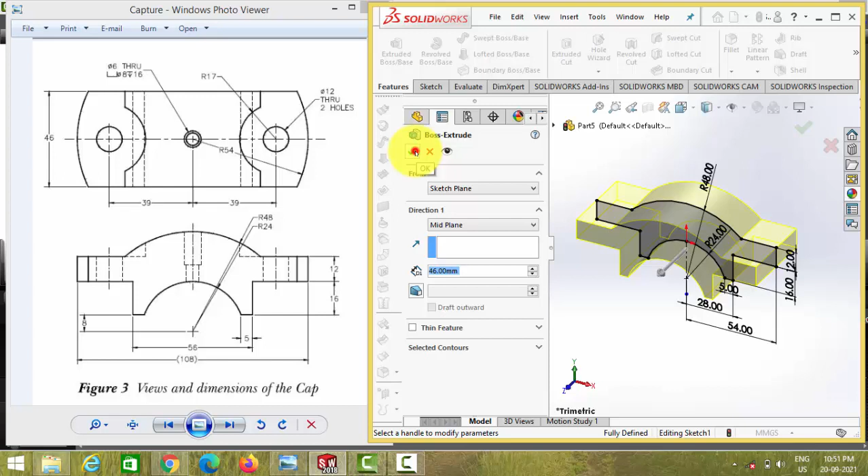And there are 2 holes on both the sides having 12 mm dia. Selecting this plane and sketch. Give Ctrl 8 to make the plane normal. The diameter is 12 mm. This point and this point are horizontal. The center distance is 39 mm.

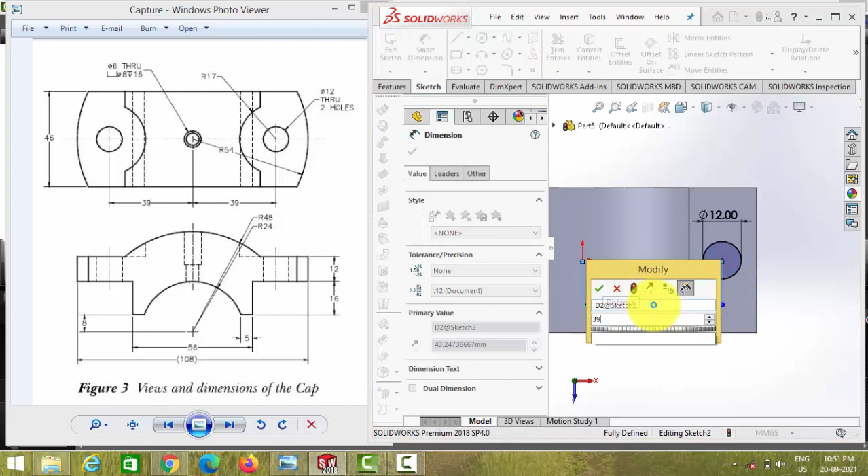And this is a through cut, so I am giving extruded cut through all.

Then we have to create a curve like this. Draw an arc. The center point of that arc is exactly at the center, so I am selecting this point and this center and coincident. It's having a radius of 54 mm. Now it is fully constrained.

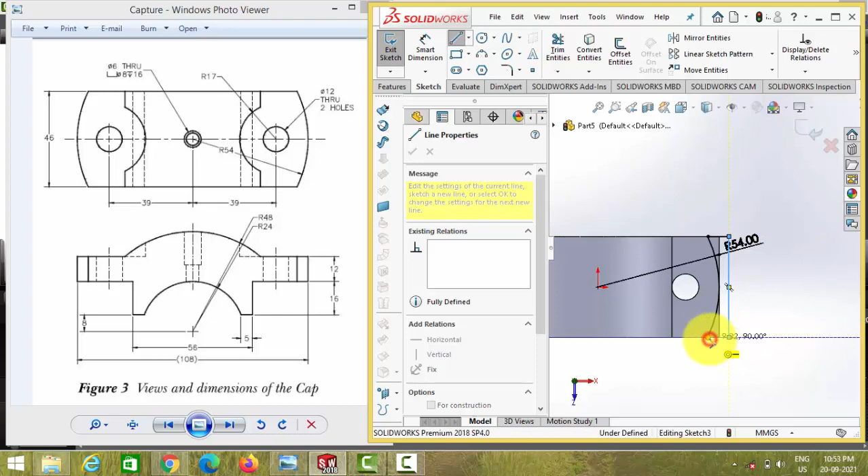Let us close the sketch. So this has to be removed, so I am giving extruded cut for through all. Let me check the direction, it's right.

Okay. Then we have to create a small curve like this. So for that I am using this plane for drawing that sketch. Here we are having an arc with the radius 17. It is having its center here. So this circle and this point are concentric. Its radius is 17 mm.

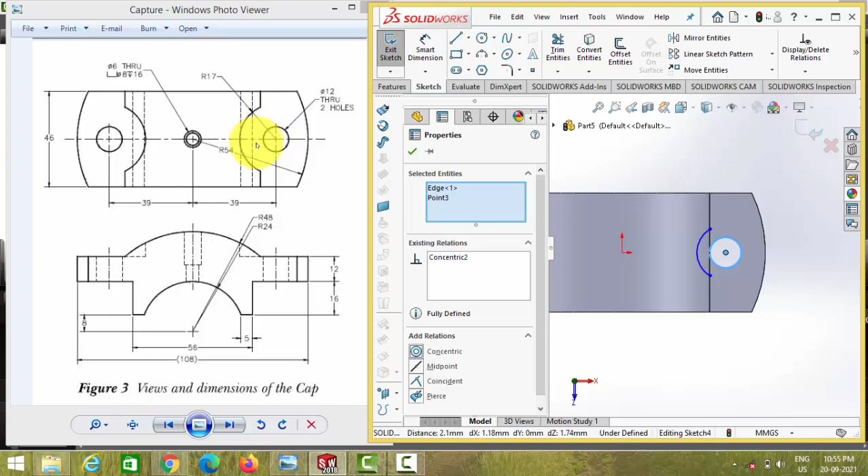Close this. Okay, now go to feature and give extruded cut. Flip the direction and give through all. Okay, we have performed that.

So all those things has to be done in the left hand side also. So I am selecting this cut extrude, this cut extrude and this cut extrude and giving mirror, and selecting mirror plane as this right plane. So now everything has been transferred to the other side.

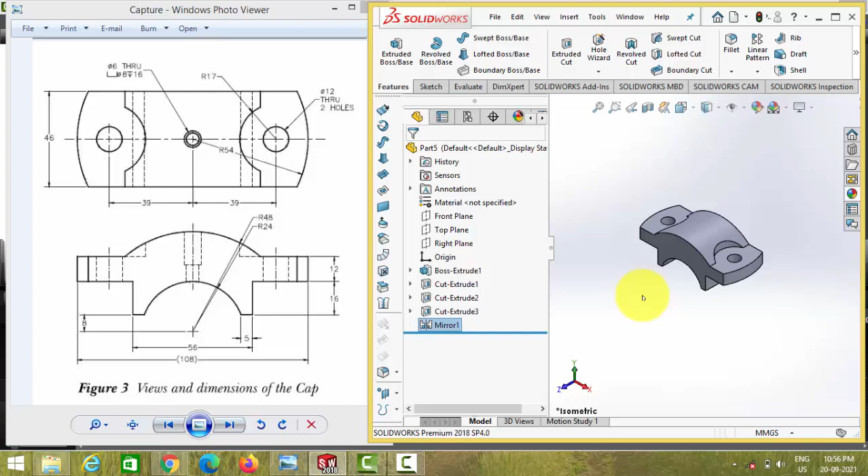Okay, so then we have to create a hole here. For that I am preferring the center plane. Where is that? Here. So here I am drawing the diagram, Control 8. So here we need a hole like this.

Okay, I am giving dimensions here. This is having a dimension of, here it is given 16 mm and 8 mm and 6 mm. So this is 6 mm, so its radius is 3 mm. This is 8 mm, so its radius is 4 mm. And this is having a height of up to 16 mm. So this is 16 mm here.

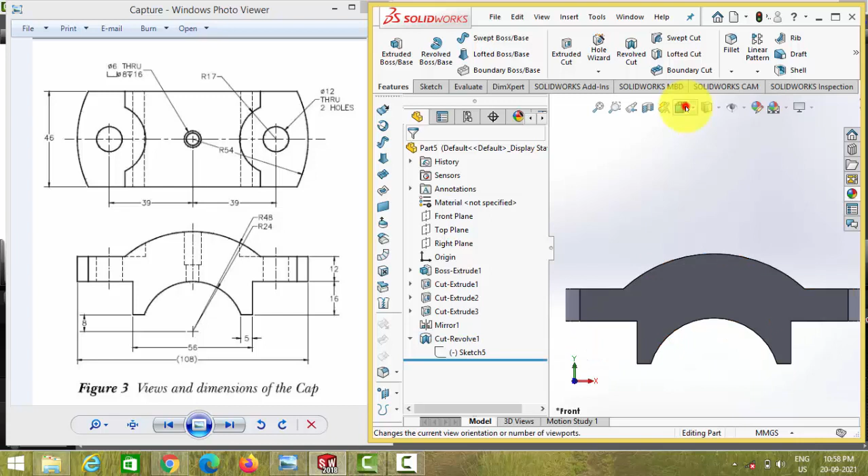Okay. So now it's almost done. So now we have to remove the material by using the revolve cut option. The axis of rotation is this. Let us see that in the top view that a cut has been created.

Okay, now everything is done in this cap part. So let us save this part as cap and then move to the next part.

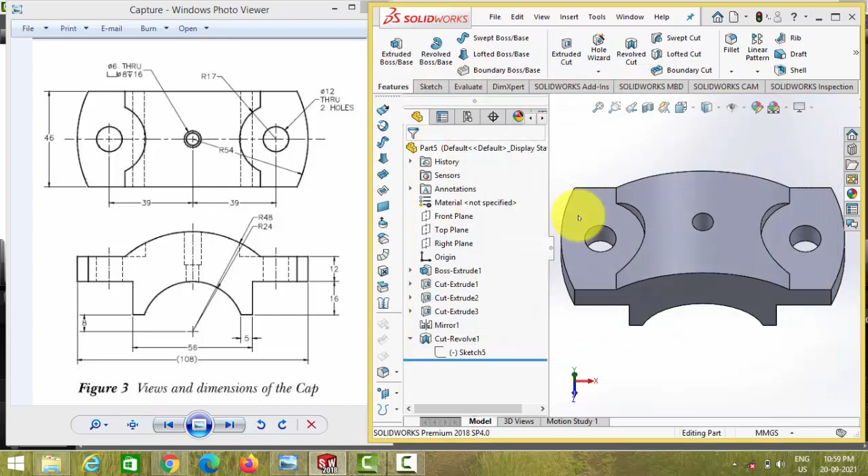That is this bearing. Now I am closing this and opening a new part, that is bearing. We have to create this cross section and we can revolve that. So I am taking the front plane and sketching.

First of all, I am drawing a center line over here. Then I am drawing half of that and I will try to mirror that. Okay, first let me give a constraint. This point and this point are vertical. Okay, then we'll give the dimensions.

This is 32 mm, so this will be 32 by 2. Then this is 44 mm, so this will be 44 by 2. And then this is 48 mm, by 2. This distance is 9 mm. Total diameter is 64, so I am giving this here. This is 64 by 2.

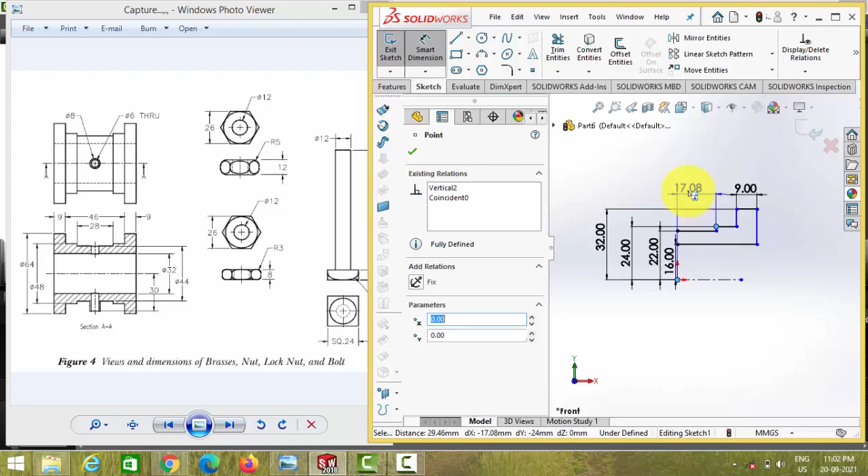This is 28 mm, so this distance will be 28 by 2. This is 46 mm, so this distance will be 46 by 2.

Now one dimension is missing, it is missing. This has to be vertical, so we can give this as vertical. So now everything is constrained. So what we can do is mirroring everything by, let us create a center line here.

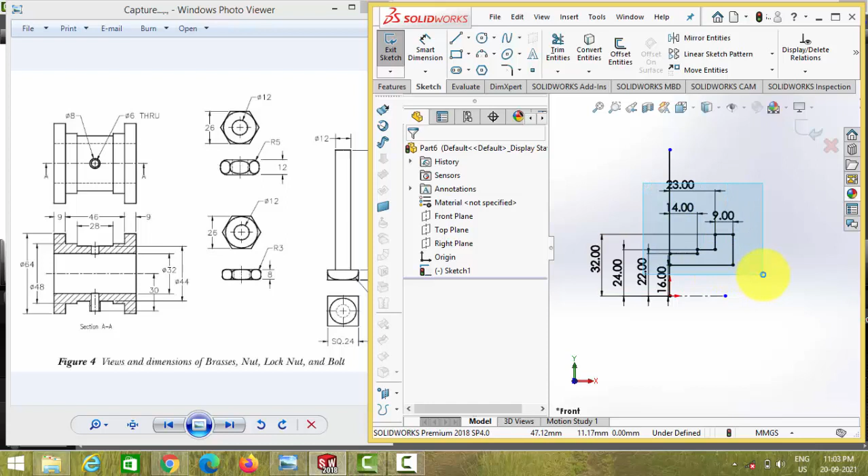A vertical center line. Now let us select all these edges and give mirror entities, and mirror about this center line. So it has been mirrored. And now create

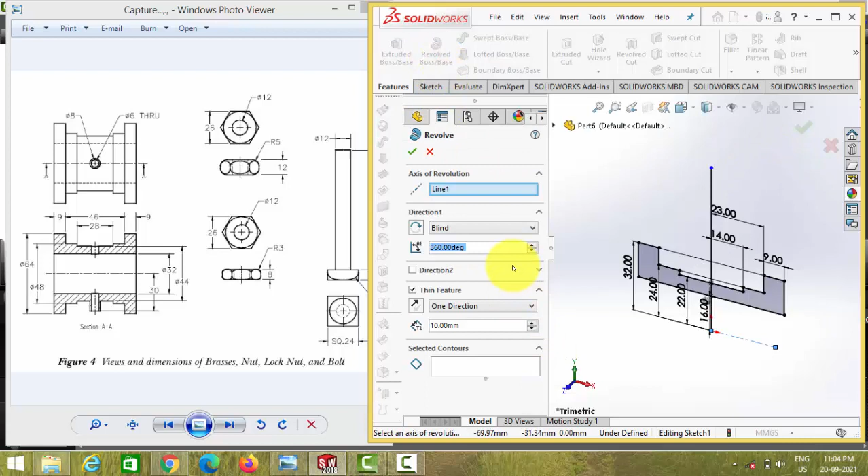that is not extruded boss, that is revolved boss. Axis of revolution is this line. Revolve. So the axis is already selected as we given.

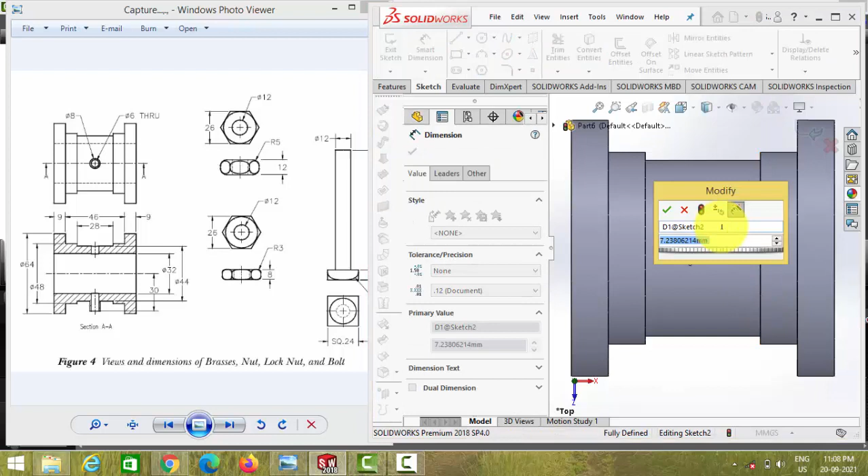It's done. Then we have to create a hole over here, a through hole having a diameter of 6 mm. So I am selecting the top plane, selecting sketch, drawing Control 8, and drawing a circle of diameter 6 mm. That is a through hole, so I am giving extruded cut

through on both the sides. So it has been created. And then we have to create one more thing, that is a small projection here.

If you want to draw this projection, we cannot create a sketch over this curved surface. So instead, what we can do is create the sketch in the top plane itself, and offset that to some distance 30 mm below that. Let me do that. I will select the top plane, give sketch, and draw the sketch over there.

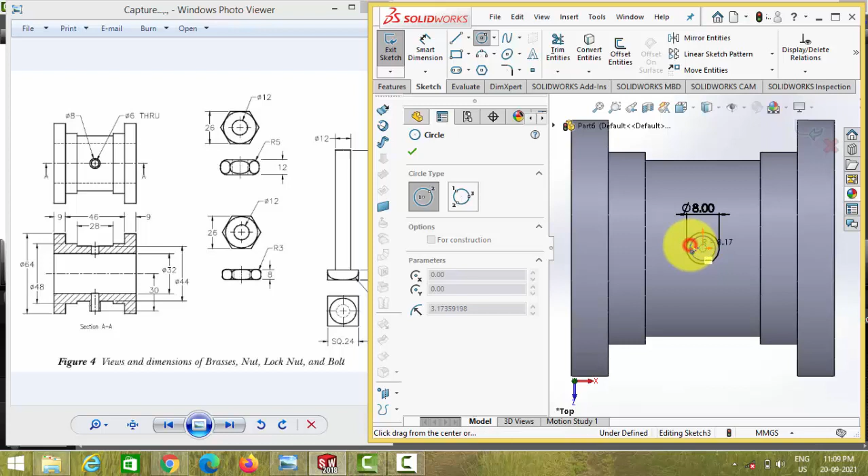You have to draw an 8 mm circle, and also a 6 mm circle.

Then we have to go to create extruded boss, and now we have to be very careful. Go to the 3D view, isometric view, and we should not extrude from the sketch plane. We have to create an offset plane. That offset should be on the bottom side, so I am changing that direction.

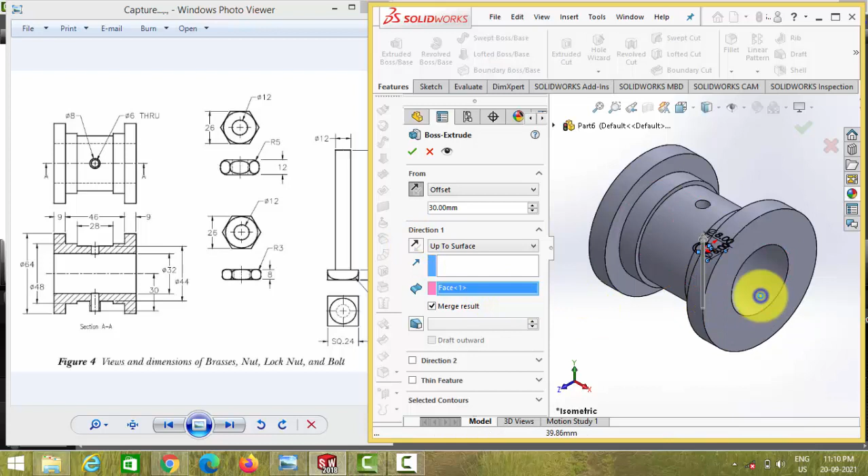The distance is 30 mm, so we have to extrude from here. Offsetting distance is 30 mm, and extrusion distance can go up to this particular surface. We can give up to surface, change the direction, and this surface is the limit. I think it has been created successfully.

Let me check that. Yes, we have created that successfully. We have drawn these two circles in the middle plane, offset that plane to this 30 mm distance, and extruded that up to this surface. It's done. So now we have completed this bearing.

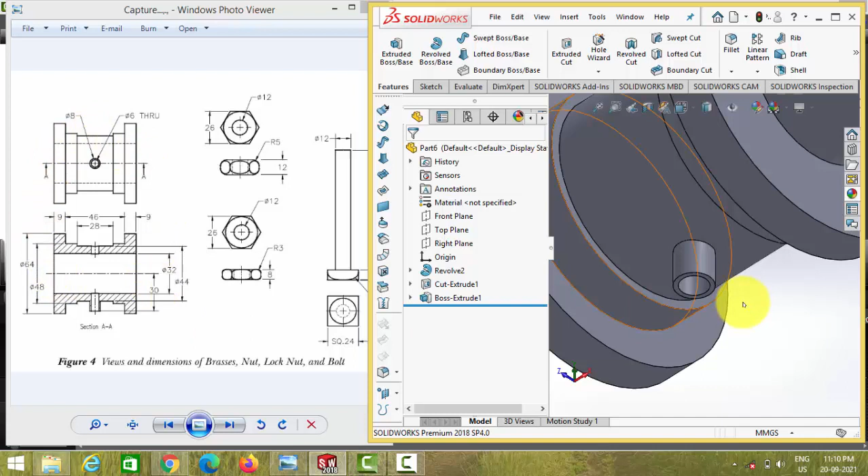Let us save that, and then we have to draw this bolt and nuts and lock nut. I am closing this. To draw this bolt, I am creating a small extrude.

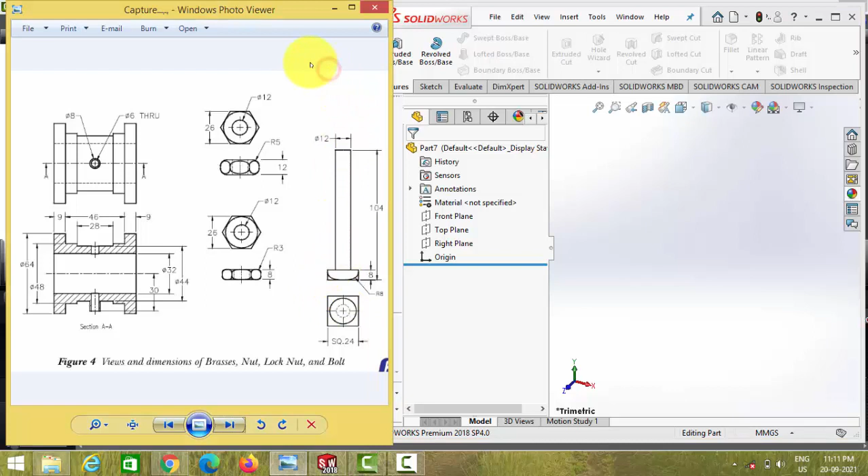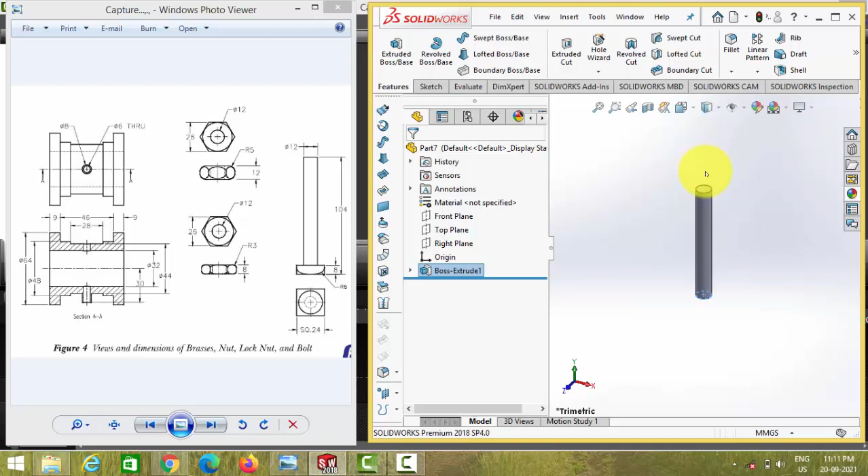Go into top plane and sketch a simple circle of diameter 12 mm, and the extrude should be a dimension of 104 minus 8. So that is 104 minus 8, 96 mm. Then at the head of this we have to draw the bolt head.

That is actually a square, so we have to create a square. We can draw a center rectangle, click the center and draw this, and we can give only one dimension, that is square 24. So we give one dimension as 24 mm, and give a constraint: this line and this line are equal in length, so it will create automatically.

So it has to be extruded for a length of 8 mm. Going to features, extruded base for a length of 8 mm. Let us check the direction. Yeah, it's correct. So we have created that.

Then we are seeing a small blunt surface is over there, so as to create a circle when viewed from the top. I am doing that by drawing a sketch in this right plane, giving sketch, Control 8. I am drawing a small arc.

That is having a radius of 8 mm as given in this sketch. This is having a radius of 8 mm. Now I am closing this sketch. Before that we have to draw an axis for revolution. I am drawing a center line.

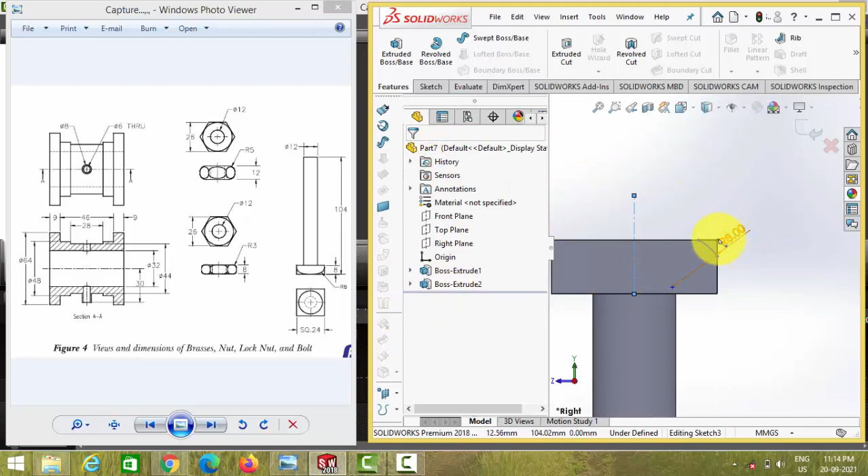Now I am going to features, revolve cut. So now the axis has been automatically detected. Zero thickness geometry - so let us do one thing, go to the geometry and extend these lines so that it will create without any problem.

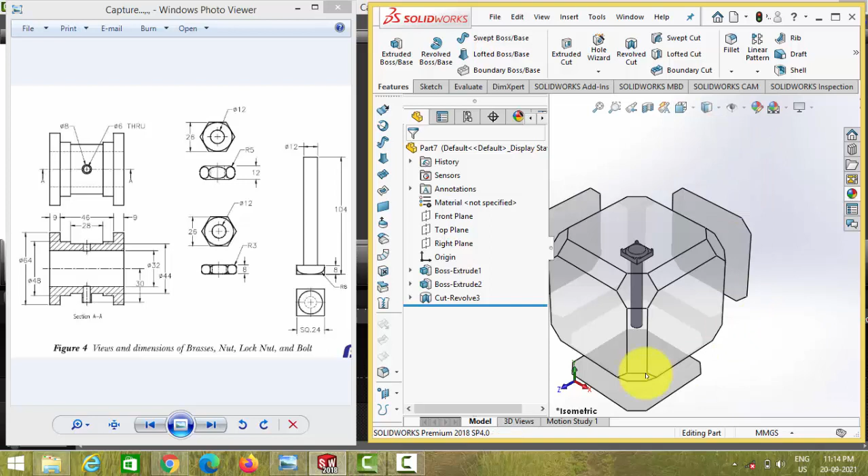I think it's not sufficient. Okay, now it's okay. So now we have created what we expected. We can see the top face as in this diagram, and then

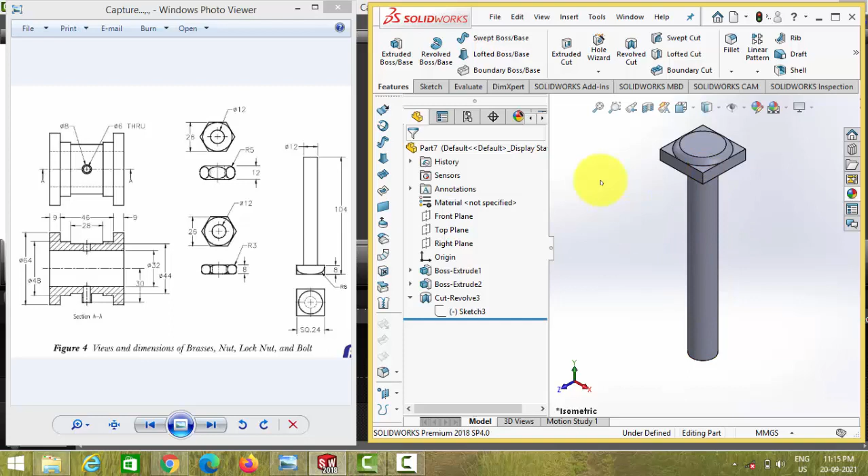we need to draw thread. As we are having very short time, I am skipping that. I am saving this as bolt. Then I am drawing these nuts. I am creating a new part.

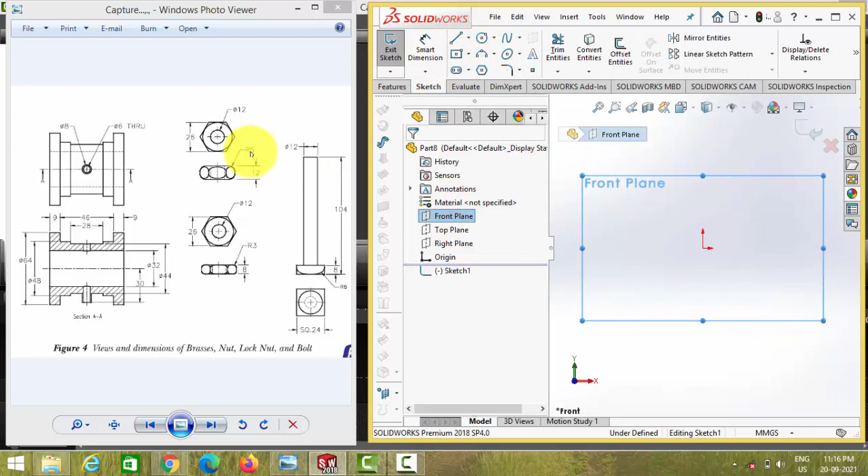I'm selecting any plane, and the nut is having hexagonal shape. It's a hexagon, having a hole in it. I'm drawing this nut first. It's having a diameter of 12 mm, and this height is 26 mm, and this line is horizontal.

Now it is fully constrained, and I am creating extruded boss for a length of 8 mm. So giving 8, and it's okay. Then we have to create a small fillet like this.

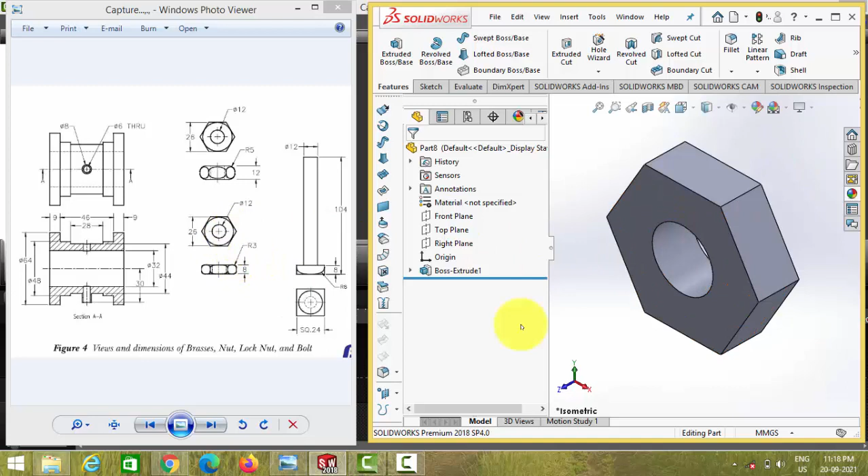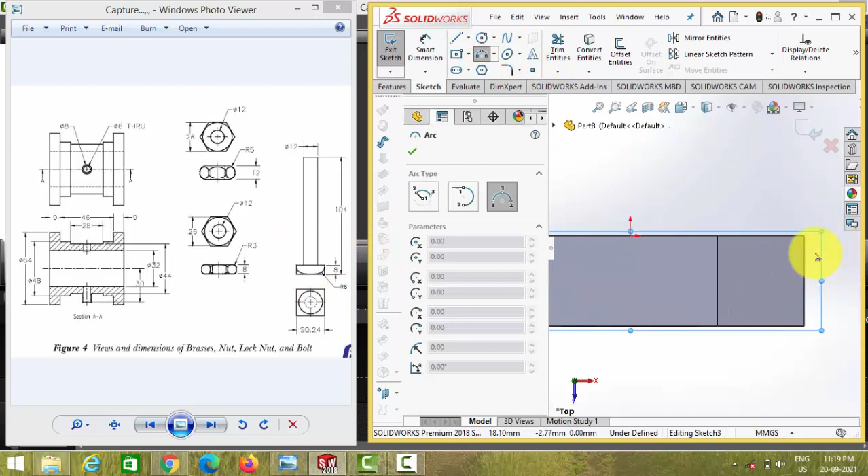For creating that small radius, we have to select a plane, selecting this top plane, so that is having that corner. So I am giving sketch in the top plane and drawing a small arc of radius 3 mm. Okay, now let us close the contour.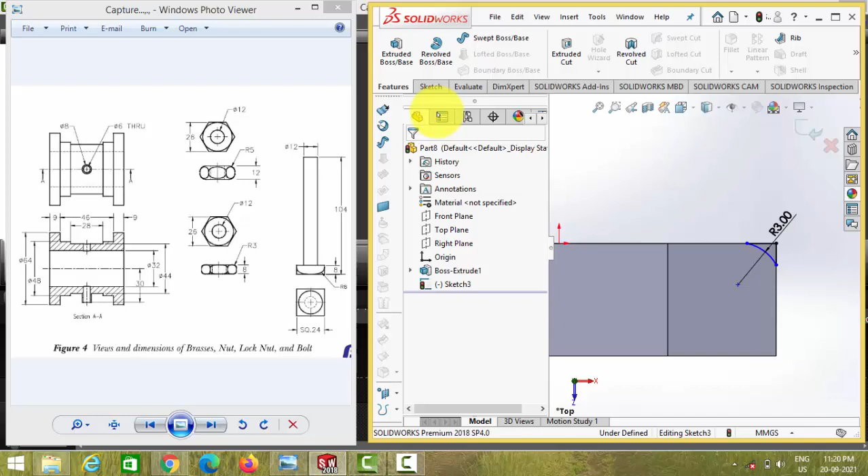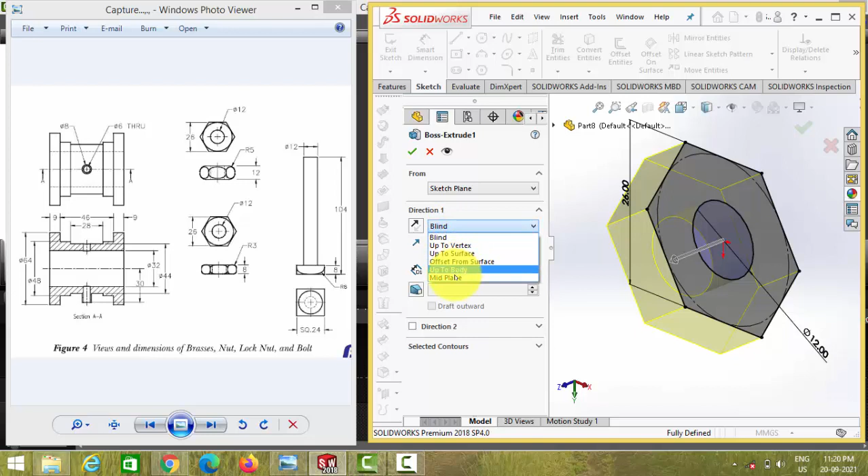Okay, then give a revolve. Before that, create a construction line, that is center line here. By keeping this as center, we can revolve that. So if you want to have the same in the other side, while extruding we have to extrude as having mid plane, so we can do this as a mirror.

By selecting this front plane as mirror plane, okay, now we have got that on both the sides. That's ready. So let us save this with name nut, and we are having one more component which is similar to that, that is lock nut.

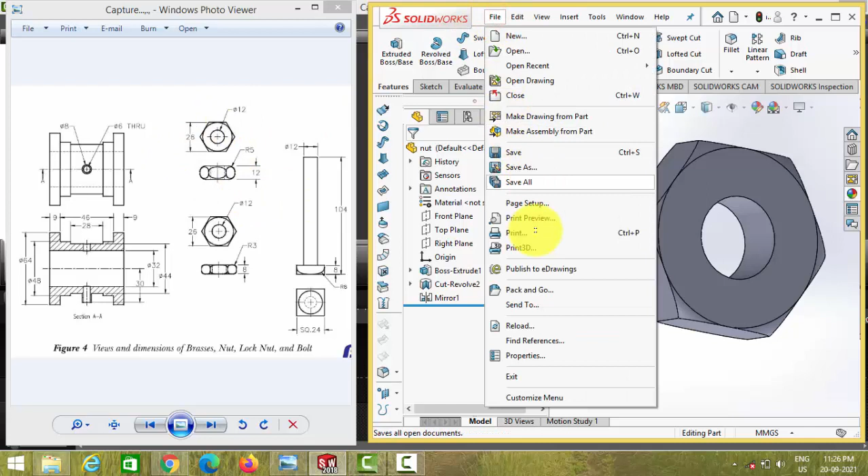That is also having more or less the same dimension. So I am doing save as lock nut, but the lock nut is having some different extrusion. This is 12 mm, so I am changing that. Edit feature, I am giving that as 8 mm.

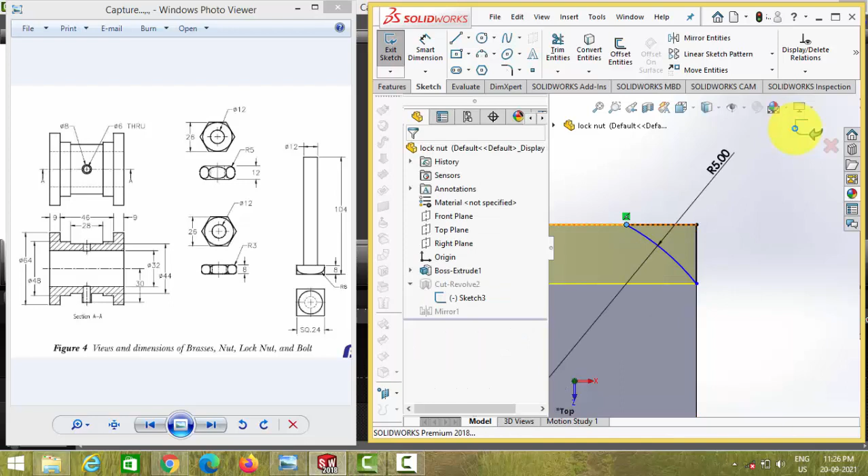Then the radius is 3 mm here, so I am going to that cut, sketch in the cut revolve, and changing the dimension as 3 mm. Okay, so now it's ready. Now we can save this.

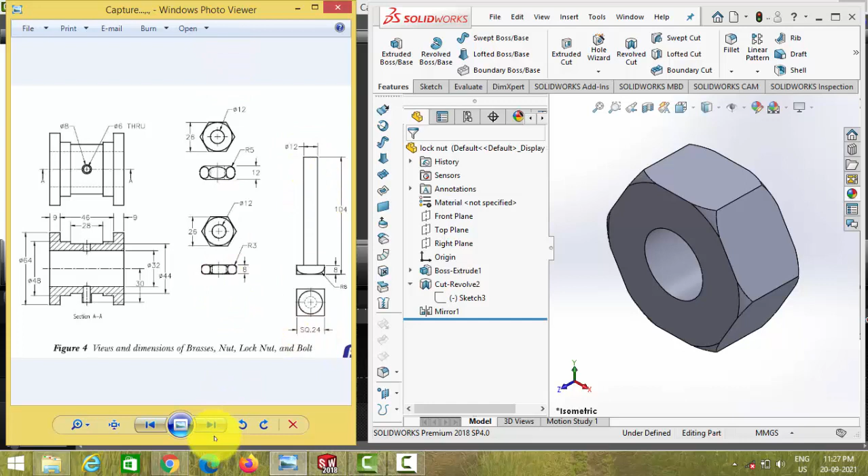Lock nut. So we have created the base block, created the cap as well as the bearings as well as the bolt and nuts. Now let us assemble all those things. Close this part and open a new assembly.

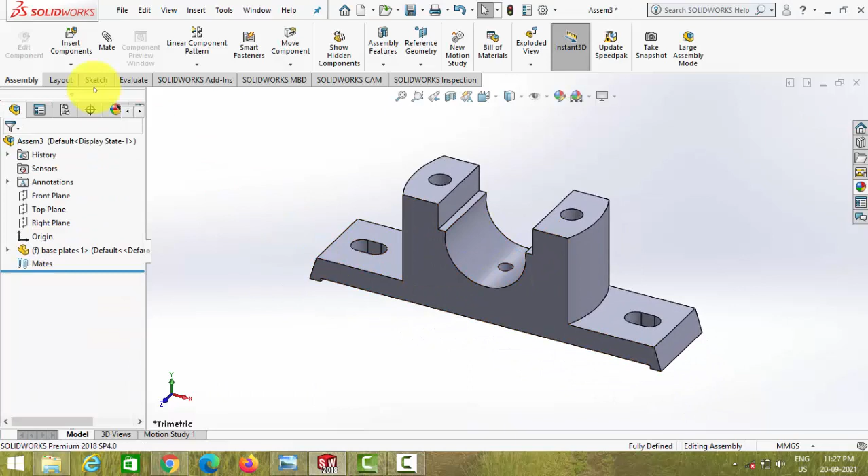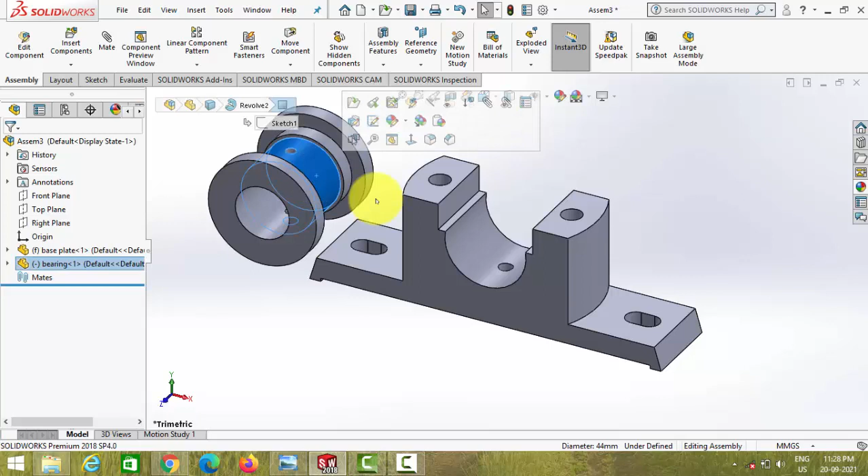First import the base plate and keep somewhere, and then insert components, insert the bearing, and we have to rotate that bearing along the direction Y so as to keep it in position. So in Y axis I am rotating, so this is the correct direction. Now this surface and this surface should be concentric, so by default concentric mate will be there.

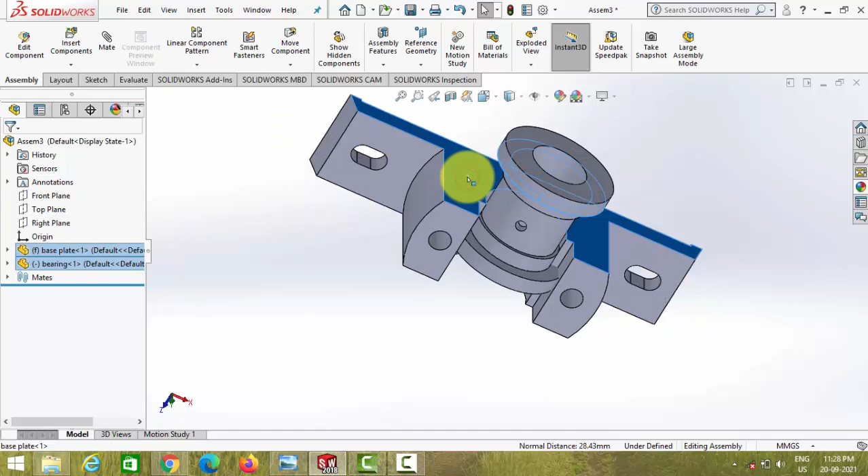Still it's moving here and there, so this surface and this surface should be mated with coincident mate. Okay, now it's over.

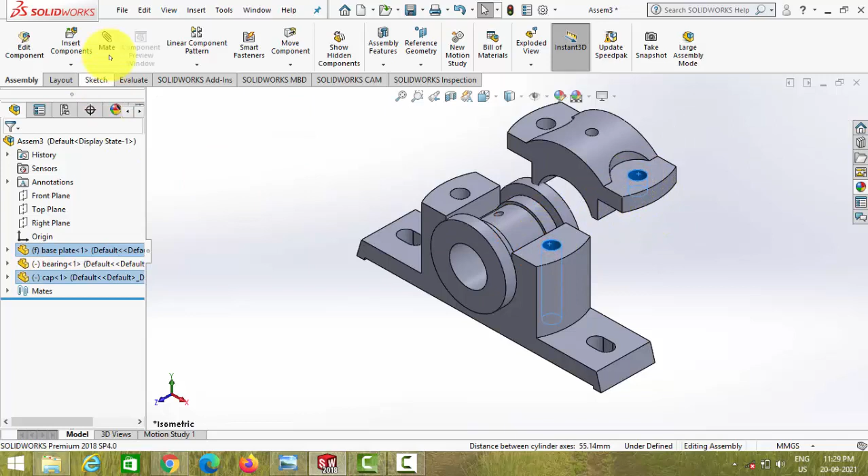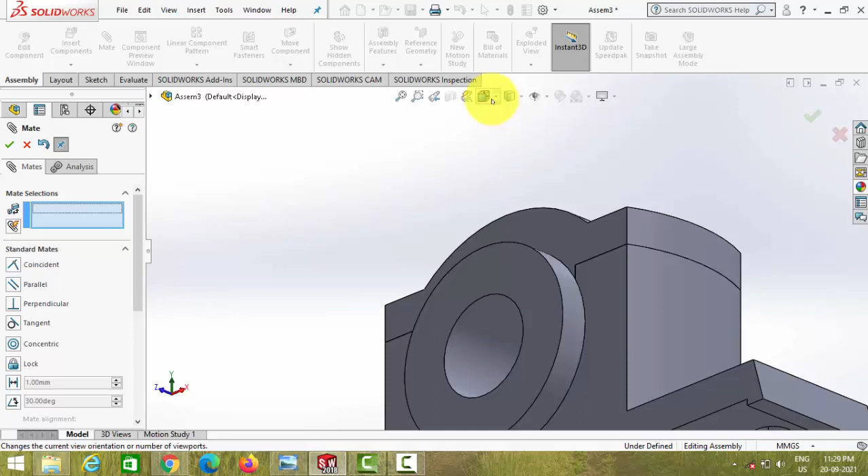Then import the next component, that is the cap. Insert components, cap. Keep the cap somewhere and select this circle and give concentric mates. That's one thing. Again select this circle and give concentric mate. Then this surface and this surface are coincident. Okay, now this component has been assembled.

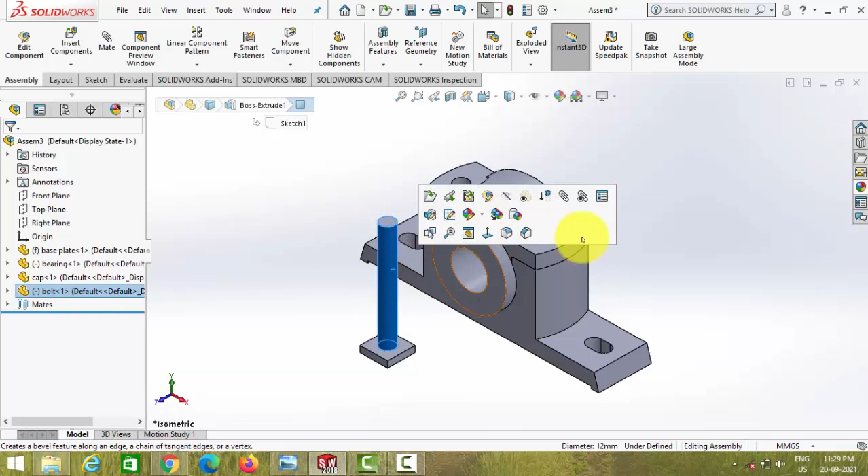Then we have to insert the bolt. So the bolt has to be in inverted position, so that has to be rotated in X axis twice. Okay, now it is rotated. So now this surface and this surface are concentric. Again this surface and this surface are coincident, so coincident mate is there.

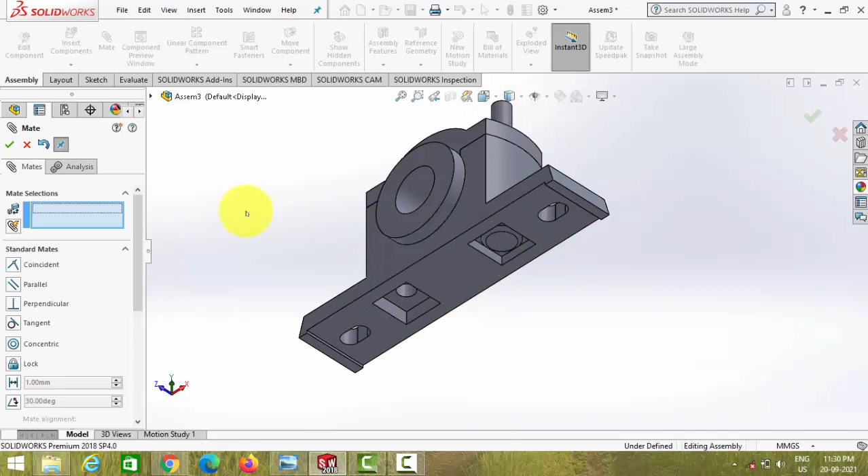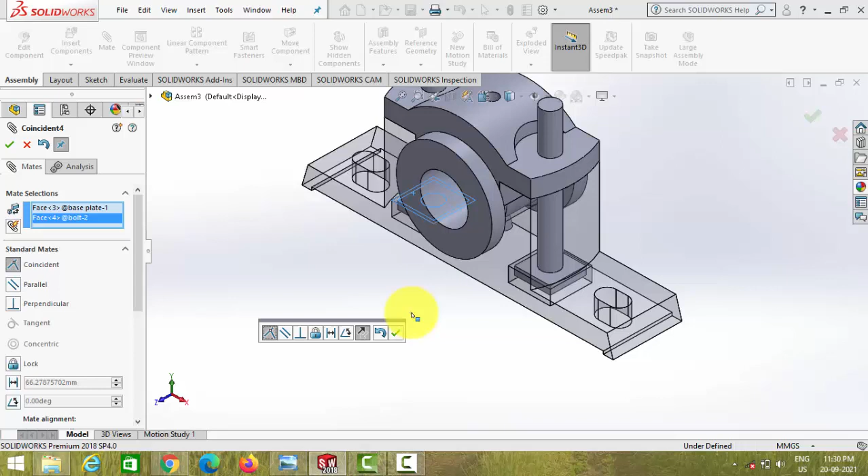Then now we have to import the same component. So one thing we can do is click the control button and click and drag, then do the same thing again. Click this surface and this surface, these two should be concentric, and again this surface and this surface are coincident.

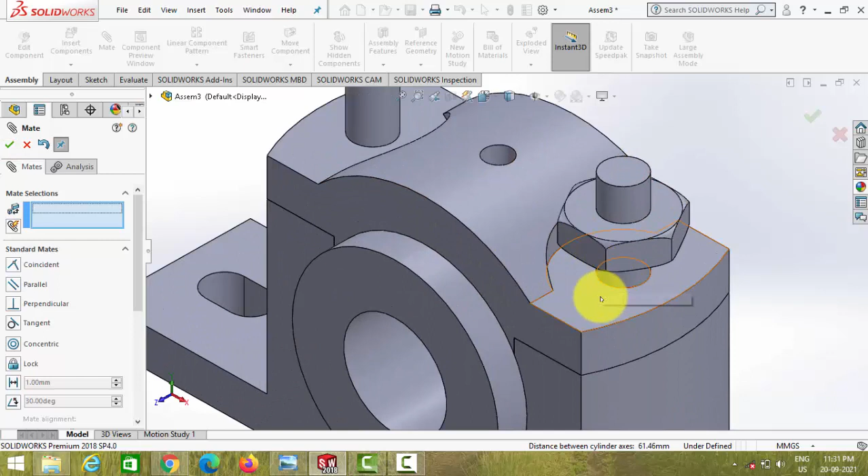Then we have to import the nuts. I am importing the nut first. That has to be rotated in X direction. Okay, now this circle and this surface are coincident. Then this surface and this surface is coincident.

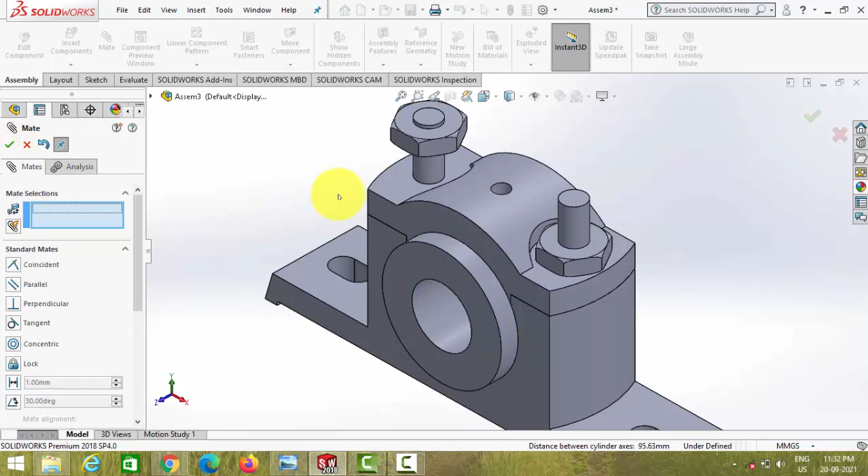Again we need one more component like this, so click control and click and drag the part. This surface and this surface are concentric. Then this and this are coincident.

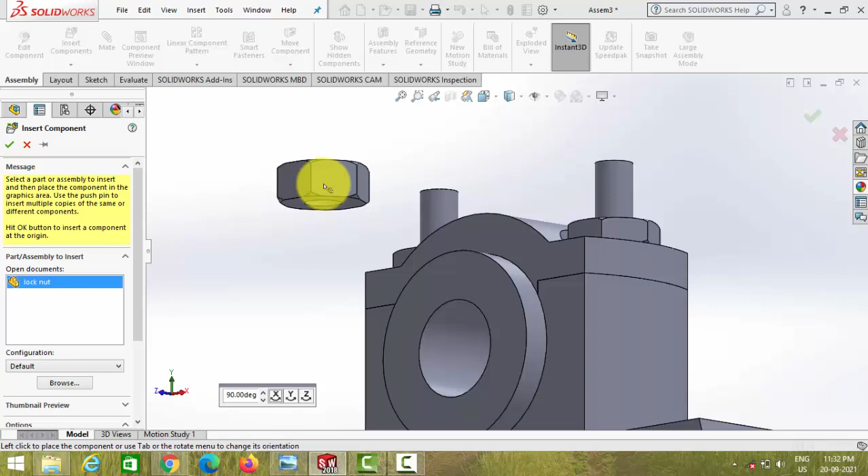Then import the lock nut, rotate that along X direction. Okay, now this circle and this circle are concentric. Again this and this are coincident.

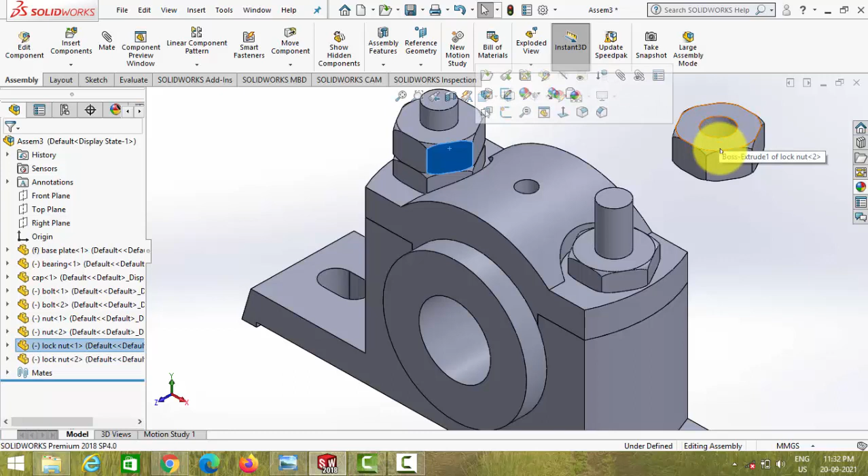I want to duplicate, press Ctrl and drag another one. This surface and this surface are concentric, and this one and this surface are coincident. Okay, now we have imported all the parts.

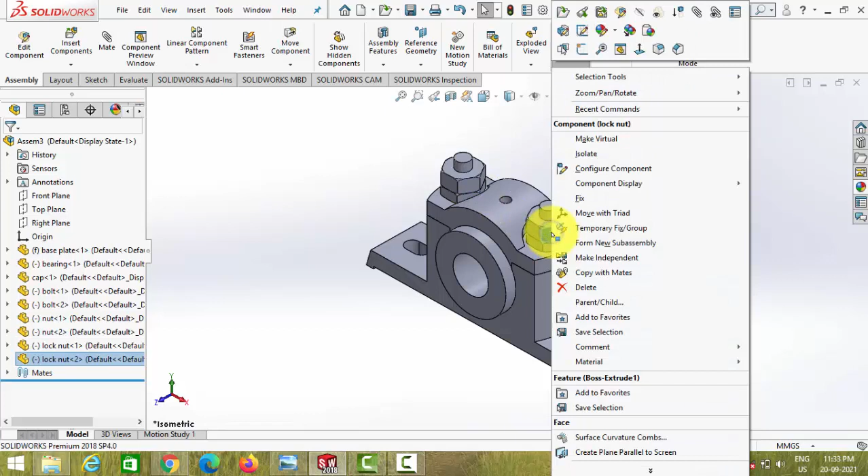Now these nuts can rotate, so we can keep that in any position, and we can also lock that in position. We can fix that. We can keep in position and right click and fix that. So once it is fixed, it cannot be moved anymore. Okay, we can also give some attractive colors to differentiate the parts.

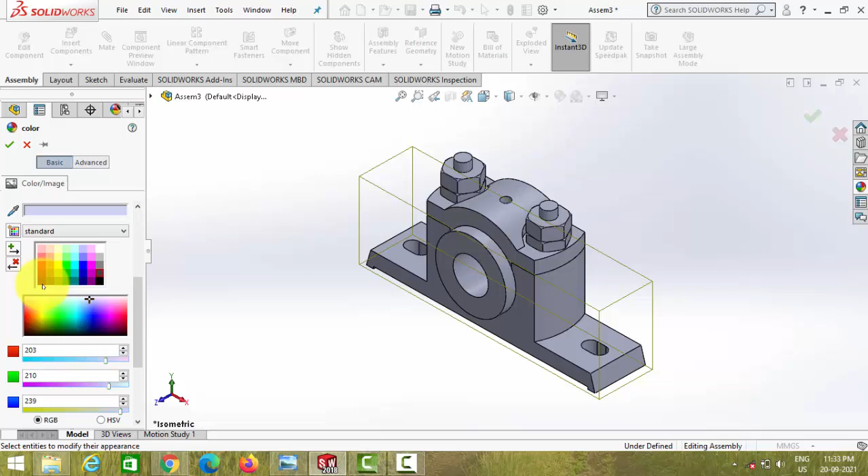So let me give this base plate, going to appearance, and I'm giving a red color to this base plate, and I am going to this bearing and going to appearance, and that bearing is almost gray in color.

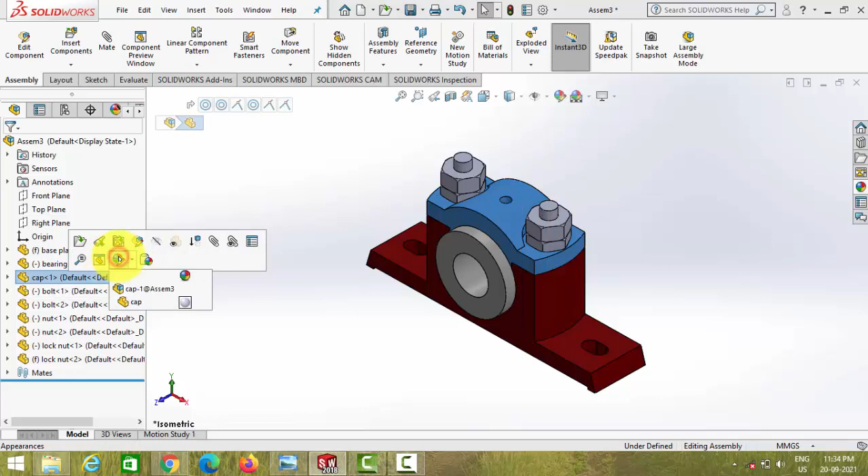Then going to the cap, I am giving some different color, and coming to the nuts and bolts, I'm selecting everything and giving the same color.